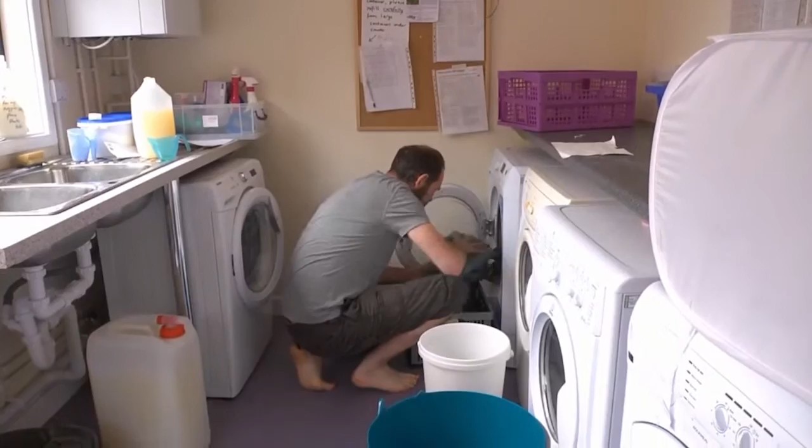We've got a shared laundry, so we don't all need to have a washing machine. We've got a workshop with one set of power tools, so we don't need 20 drills on site. We've got lots of space here, so there are shared community gardens, and a common house, which is a great facility we can use to sit down and have dinner together.

This is the entrance hall, and through here we've got the dining room, with seating for about 30 to 40 people. Three times a week we'll have a meal, which is not compulsory.

A very common feature with co-housing is that all the car parking is right at the periphery of the site, so you haven't got lots of noisy traffic coming through, and it's safer for the kids to play. The kitchen windows all overlook the communal space, so people doing the washing up can see each other through the window. It promotes community, but doesn't enforce it.

It means you get all the benefits of community without some of the downsides. You definitely have a closer relationship with your neighbours than in most other neighbourhoods, because you've got to manage those communal assets. But that's great, because you really build up strong local communities.

Often they're community-led, so in this case we all came together, stumped up the cash, also got a loan, and developed it. So we were the property developer in this case, and we designed it how we wanted it. We've also got an affordability model that makes it more financially accessible for members. There's often an additional ethos behind co-housing, and a lot of them tend to be quite environmentally conscious.

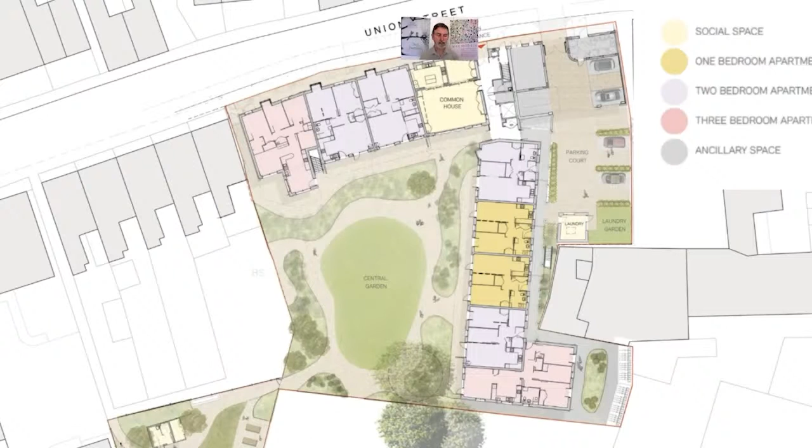In another case, we've got a more rural layout where parking is kept right to the edge of the site. The common house is the first thing you come upon entering the site, and then individual dwellings are ranged around in groups, in this case three groups, around a common area in this lovely extensive landscape.

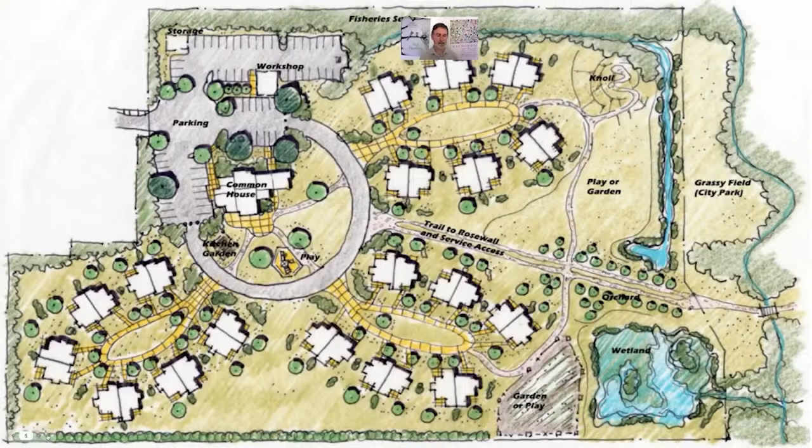In this rural case in Dorset, all the dwellings face onto a horseshoe-shaped common garden. In the case of the Leeds example, a low-impact living, affordable community, the common house is in the middle, ranged around it and around a sustainable urban drainage system pond.

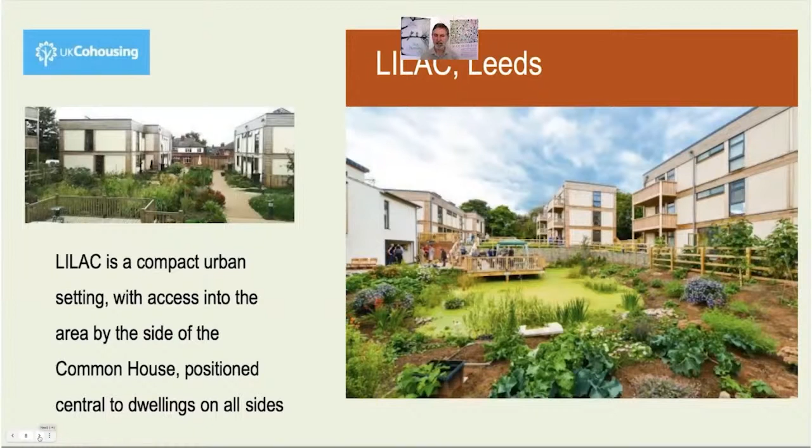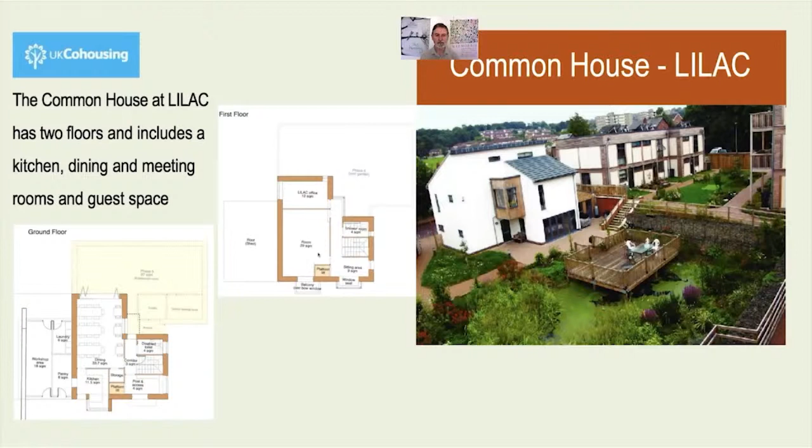A more modest room with kitchen and dining room. There's a laundry to one side, in the case of Lilac, and then a meeting room and so on upstairs, so there are common spaces where people can meet.

In the case of Lancaster co-housing, it's got kitchen, dining and leisure areas, and in some cases guest bedrooms upstairs, so it's not necessary for every dwelling to have an extra bedroom. Now, these are all about people.

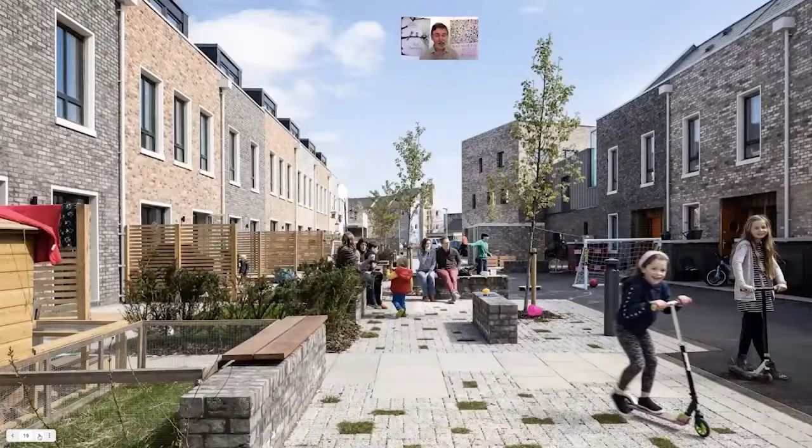Closer to home, this is Marmalade Lane—a home zone, a pedestrian street, in a new set of buildings of 40 dwellings in northwest Cambridge, where developers worked with the council and with Cambridge co-housing to develop new dwellings.

Designing for life is one of the crucial things. I've talked about intergenerational living, but too many of our homes aren't appropriate for us as we get older, and aren't flexible enough to adjust to different family sizes over a lifetime. So this is one of the principles.

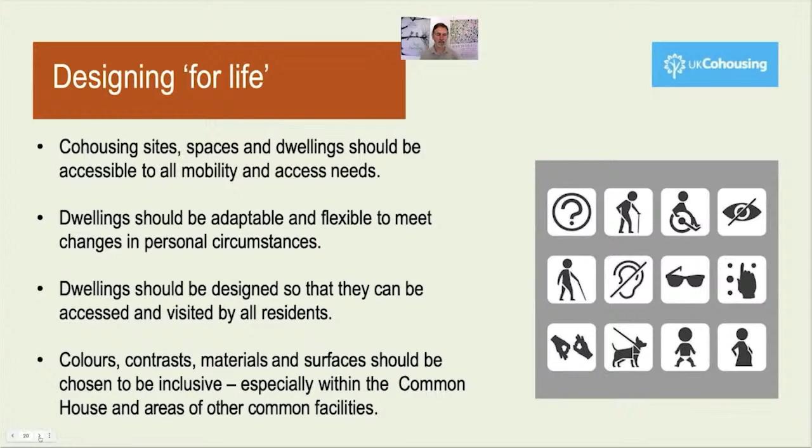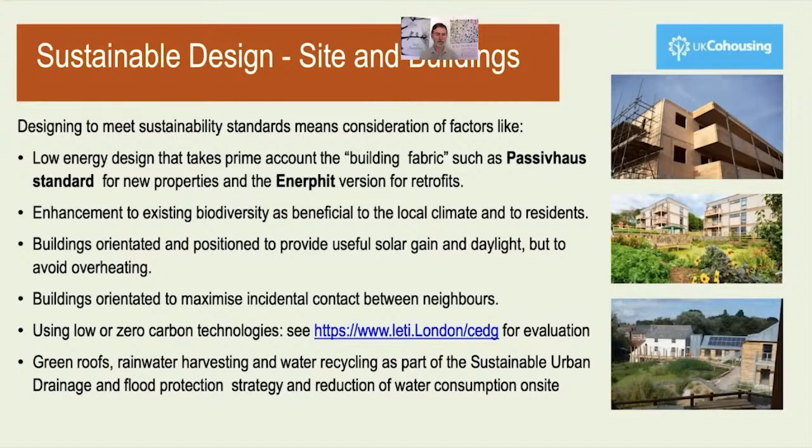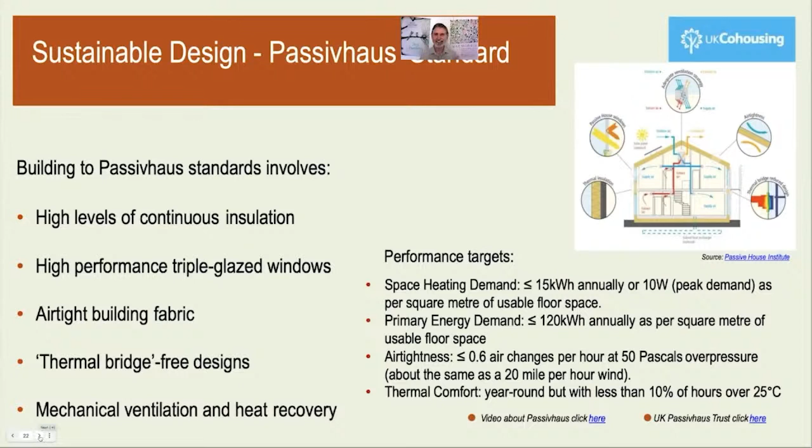Continuous insulation wrapping the building is absolutely crucial to reduce thermal bridges and the risk of dampness and cold bridging. Building tight and ventilating right is a mantra, along with fabric first, that I remember from my architecture school 30, 40 years ago. These are very important principles which still haven't been widely adopted, and we should change that.

Now, I've talked about and introduced the ideas of co-housing. What I want to also talk about now is probably what's not sustainable. What's not sustainable is sprawl.

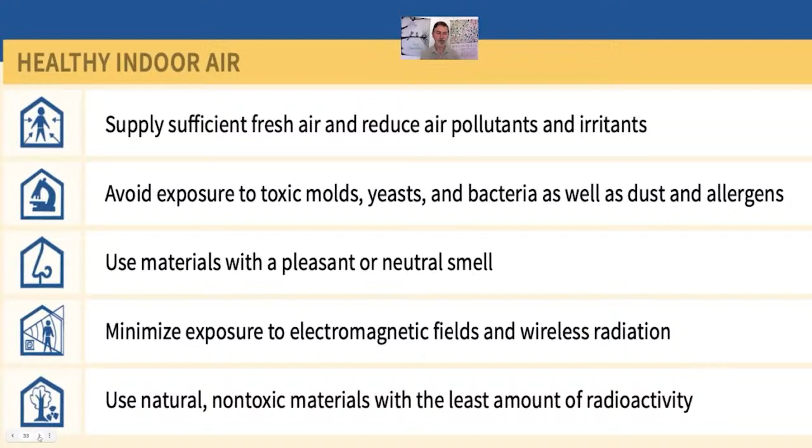But it's essential for us to think about how we can get the balance between efficiency of things and ecological balance. And there are 25 principles that are really, really helpful. I'm sure if you're wanting to follow that up, you'll be able to.

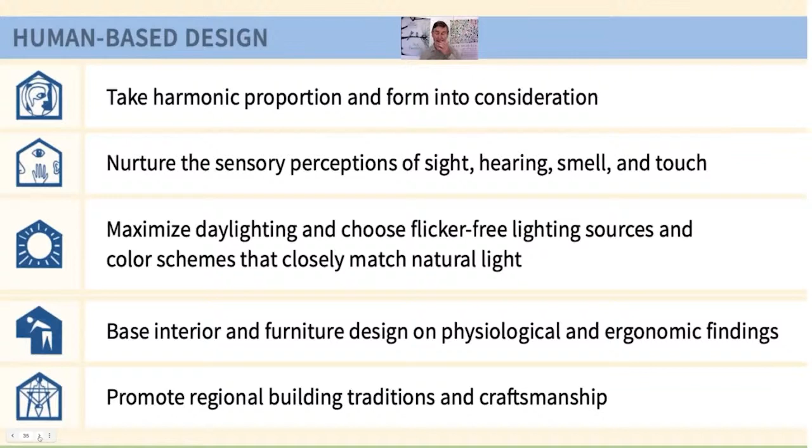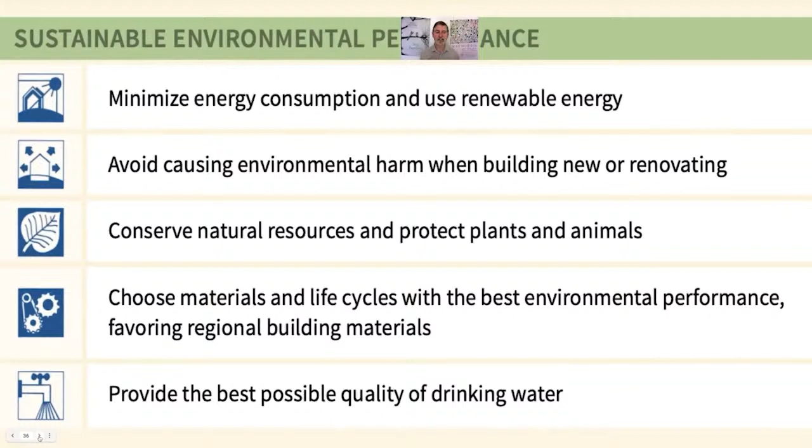Thermal and acoustic comfort, human-based designs, not necessarily working to minimum size of windows to have enough daylight coming in, which can often have a benefit from reducing the need for artificial lighting and so on. Most important, obviously, is energy consumption and using renewable energy. All of these things - there is a social component as well, and this is often forgotten.

So in the same way that we can obsess about carbon, and this net zero stuff is a bit of an obsession with carbon, we need to also acknowledge the nature emergency or the ecological emergency that is happening at the same time around us.

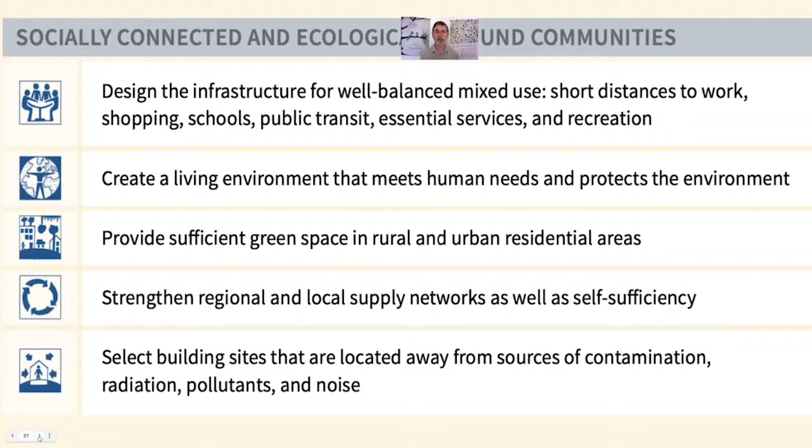Now, there's a recognition of not only the energy and carbon associated with buildings in use, but also the embodied energy. I'm just going to show you a short clip, 2 minutes from the World Green Building Council about embodied energy.

We are in a climate emergency. The IPCC special report warns that all sectors must eliminate their reliance on fossil fuels in order to limit global warming to 1.5 degrees Celsius. The building and construction sector has a vital role to play, as it's responsible for 39% of global carbon emissions.

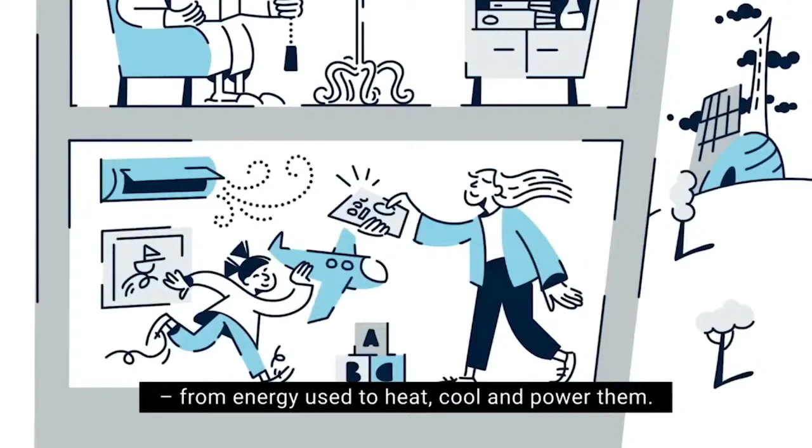The majority of these emissions occur when a building is in operation, from energy used to heat, cool and power them, but a significant amount also comes from embodied carbon: emissions as a result of material manufacturing and construction processes, building maintenance and renovation, and when buildings are demolished.

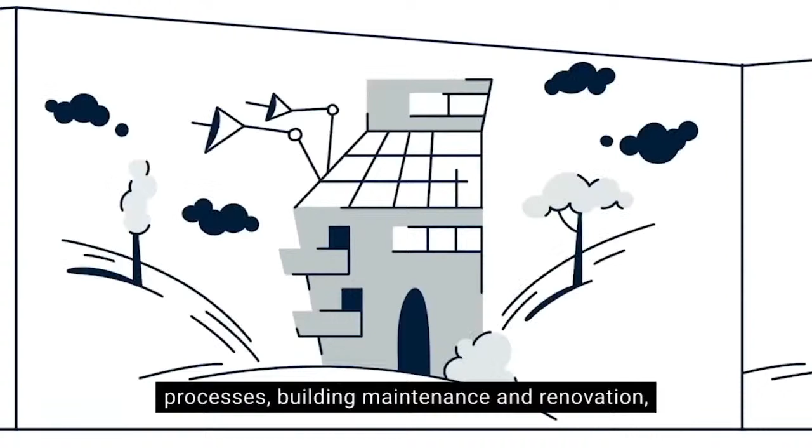In the next 30 years, global building stock is expected to almost double, so we must act now to reduce upfront carbon, the emissions generated before new buildings are used.

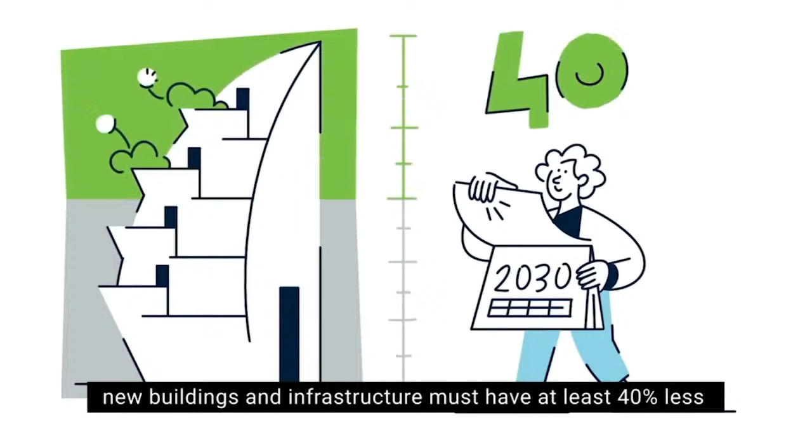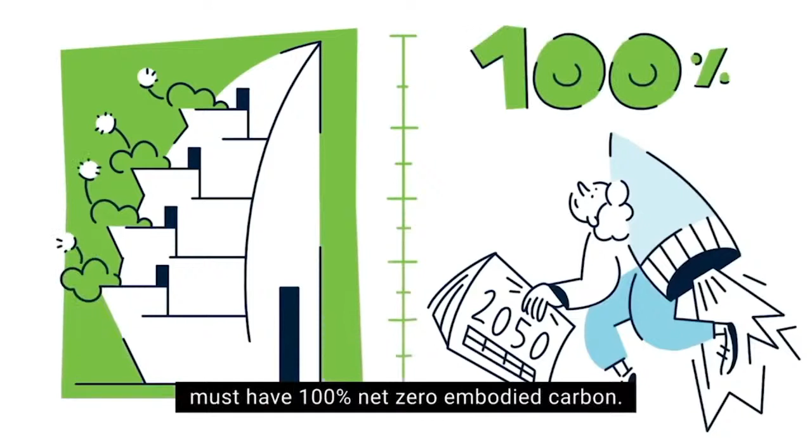Our vision is for all buildings and infrastructure to be net zero emissions across their entire life cycle by 2050. This means that by 2030, along with zero operating emissions, new buildings and infrastructure must have at least 40% less embodied carbon, with significant upfront carbon reduction. By 2050, new buildings and infrastructure must have 100% net zero embodied carbon.

Achieving this vision will require global collaboration across sectors and leadership on the following actions: roadmaps to educate, communicate and innovate towards decarbonisation solutions, ambitious public procurement policies and embodied carbon reduction targets from governments and cities, innovative financial products and services to trigger market demand, clean and lean construction processes, products produced by renewable energy, designers specifying low-carbon products and design solutions, buildings designed to maximise reuse, refurbishment and deconstruction.

The market transformation needed requires a radical change in the way we design, build, operate and deconstruct our buildings to conserve the world's precious resources.

This brings me full circle to a little case study to finish off my presentation. This is about 20 households who came together virtually online this January when we heard that Comiston Farmhouse was again being marketed and put on the market by the City Council.

It's a former children's home in south Edinburgh, in the southern suburbs, on the hill as you go south towards Biggar and Carlisle. It's in the midst of what's now an early sprawl, but still very much within the city boundaries, surrounded by semi-detached houses and bungalows in the neighbourhood.

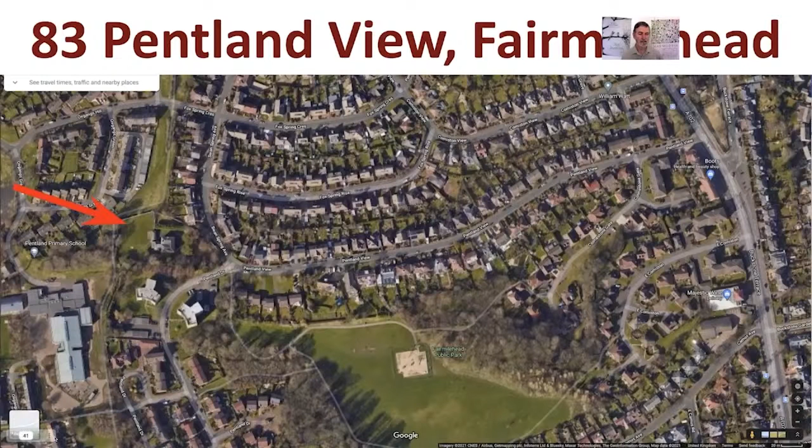We have here an acre of land in a walled garden around the original farmhouse. It used to farm the land on which these houses were built in the 50s and 60s. So it's a well-kent landmark, with cultural heritage and importance.

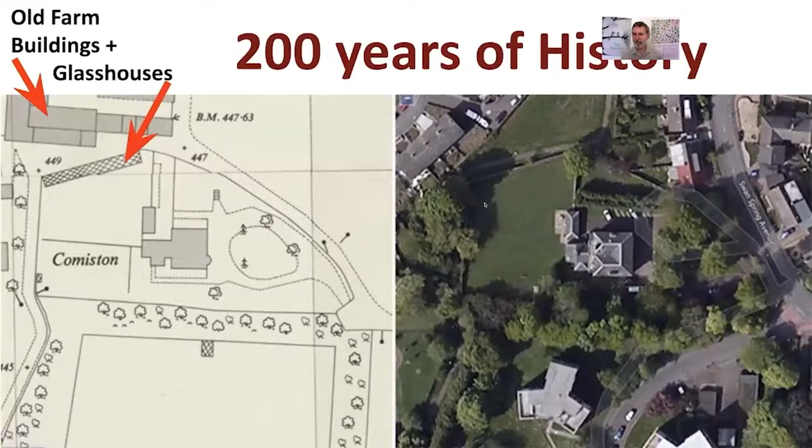Here's the acre of land, the 4-square farmhouse in the middle. Originally this would have been the back garden or the kitchen garden which would have fed the house, and there would have been greenhouses on the north wall there.

It was closed as a children's home in 2015 and put up for sale. The original bidders appointed planned to knock the building down and build 37 high-rise flats, like these ones a bit lower down the hill.

The neighbours went ape, and it was very, very unusual that the planning committee decided to vote against it after this very, very successful campaign to save Comiston Farmhouse.

So we came along after a further upset with the sales, and envisioned how we could convert this farmhouse to a community use and establish an intentional community beside it.

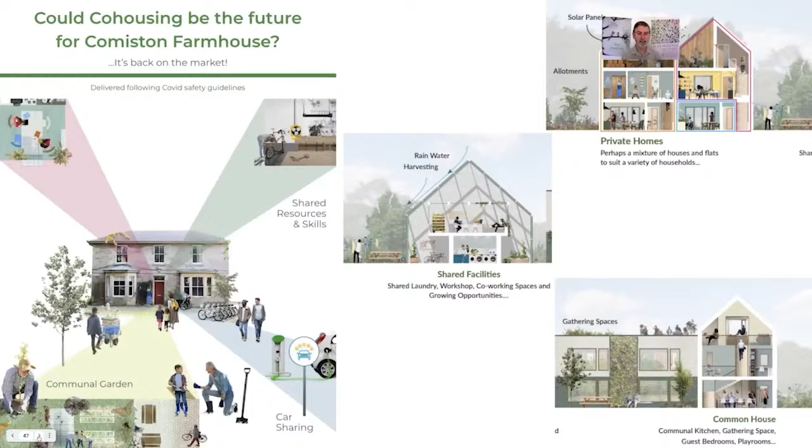We've got these 5 principles co-designed with members of the community, the residents who are going to be living there. Private homes, it's not a commune, as the guy from Lilac said at the very beginning. We would have probably had between 10 and 15 households at Comiston.

The idea of resident control: it's not a developer, it's not McCarthy and Stone, it's not Wimpey deciding what the buildings are going to be like, it's residents themselves. And most importantly, it's part of a diverse, wider community.

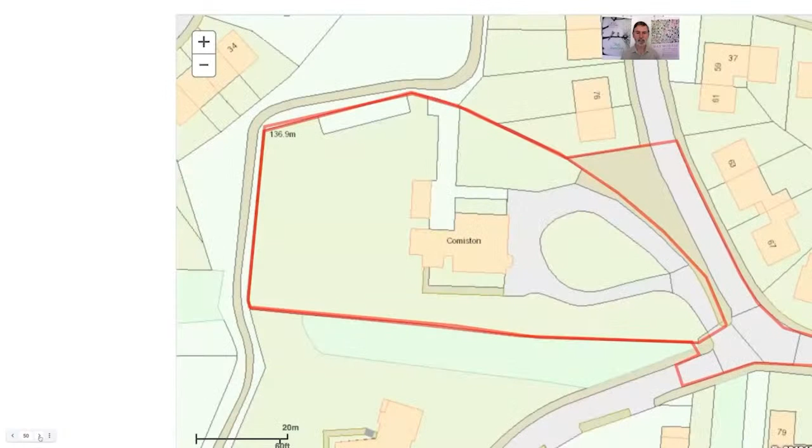So here's the site, and we originally envisaged just a terrace of narrow frontage homes on the back green. But then we found there was a culvert, a stream in a pipe running about 4 meters underneath the back garden, and it would have cost an awful lot to divert it round. I think this was one of the upsets from a previous developer.

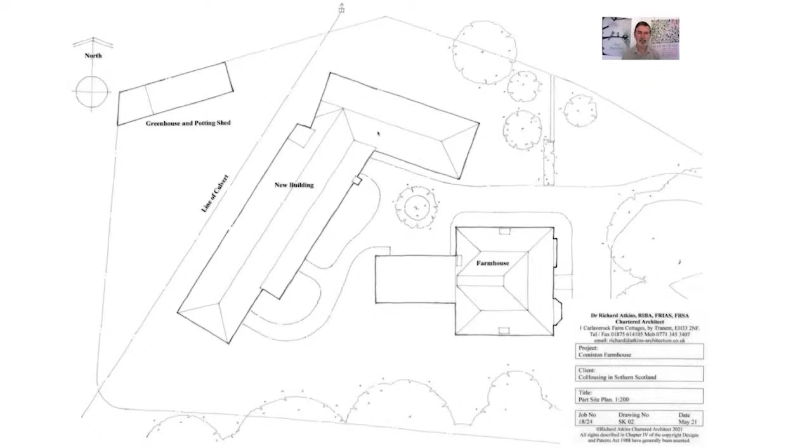So our architect designed it working with what we had: a simple terrace of 2 terraces of houses.

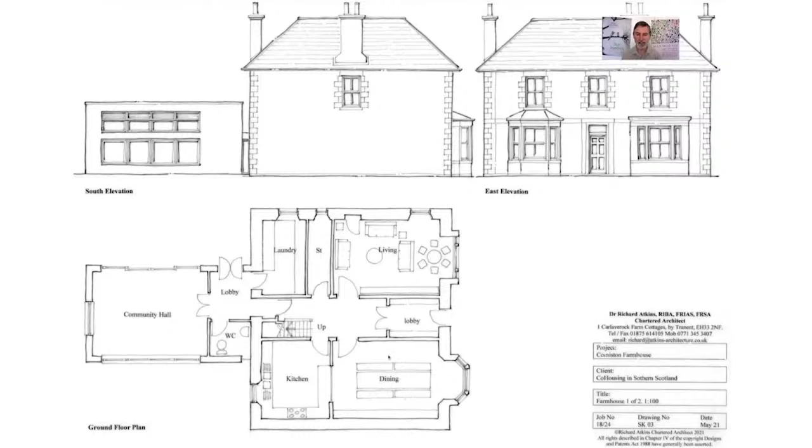Here's the existing, quite generous sized farmhouse. The big reception rooms would be used as dining rooms and could be cleared and used as a film space - you could watch films there or have a ceilidh - and a living space. Then upstairs, a couple of flats either side of the main corridor, and the L-shape of the terrace of the new build at the back, very well insulated.

And this is what I'm now going to touch on: what should we build it of? Nearly everybody, even though they were lay people, were really excited about the idea of exploring seriously the concept of cross-laminated timber or mass timber. The reason is practical - it's a very quick way of off-site construction, but also it can sequester carbon in its construction, which we just heard about from the Green Building Council.

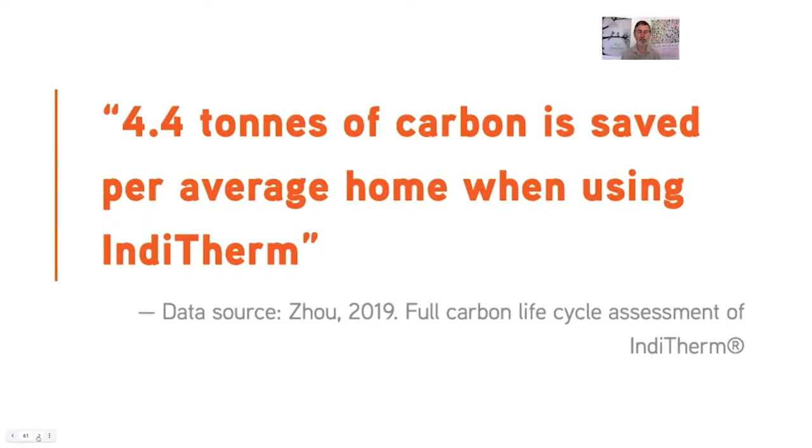Looking at the insulation, we've been exploring an innovative Scottish initiative, IndiNature, based at the Edinburgh Climate Change Institute, where they've developed a new concept of growing hemp, about 6 foot high, a plant that grows seasonally with lots of fibrous material which can be made into benign batts and boards. The growing absorbs carbon dioxide, and independent researchers have estimated between 4 and 5 tons of carbon is saved per average home. So this is good for nature, good for people - the people is the important thing.

And so I'm going to end off with some nice comments from the largest co-housing community now being constructed in Dorset, on the south coast of England.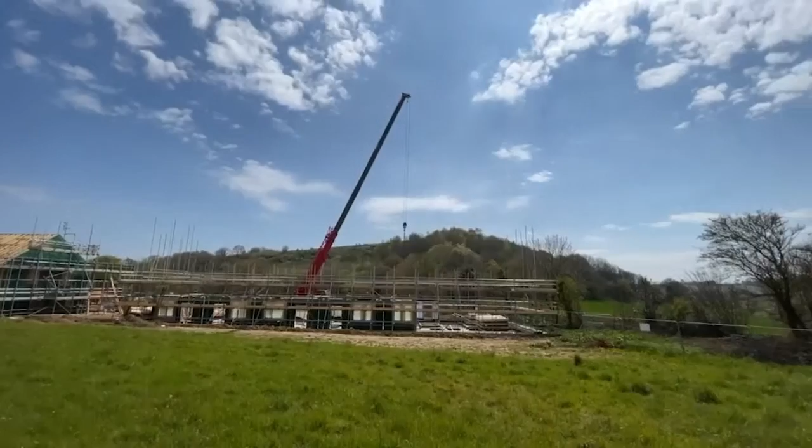Co-housing is sharing, friends, being more environmentally aware, community - hooray! Connecting, caring, growing together, reassuring in a complex world. Co-housing for us means security, living with neighbours who we know will look out for each other. My daughter and other people's children can grow up with lots of other adults looking out for them. It gives us a chance to possibly own our own house. I am looking forward to not having to worry about my landlord serving me notice every 8 weeks - it will be such a relief to have a house we can actually afford to live in. Having a modern, eco-friendly home, it will be possible to share things such as transport and food growing. We can have smaller houses because we've got big shared facilities - open fields, guest rooms, and a common house. We need somewhere to eat, I need somewhere to run and be myself, I hope we can do camping in the field. It gets harder and harder to prepare and enjoy good food just for myself - the common house will give me a place to cook and share food with friends and neighbours, all ages, all backgrounds. This common house is absolutely core to what our co-housing project is about - it's the heart of the community.

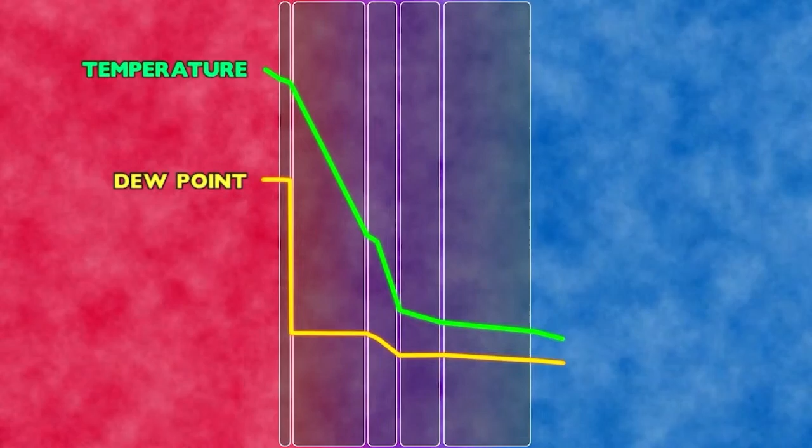So let's quickly recap on how condensation problems originate in the building fabric. As we move outwards through the building envelope, the temperature will drop according to the thermal properties of the various layers within the building fabric. Alongside this temperature gradient, we can also calculate the dew point at any given position - this is the temperature at which air becomes saturated and loses its ability to transport moisture vapour. Once this dew point temperature is reached, the airborne moisture vapour turns into liquid water and can lead to interstitial condensation if not carefully managed.

Understanding how these two temperature gradient lines are influenced by the properties and positions of the materials used is key to a robust and healthy building envelope.

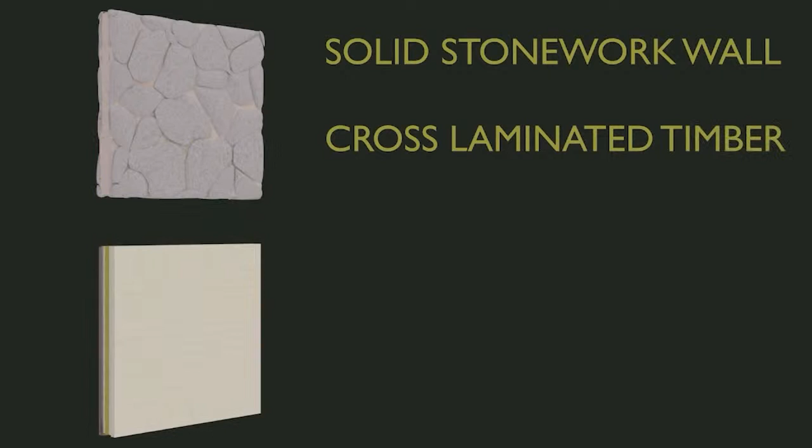To illustrate this, we'll consider two basic wall constructions: an existing solid stone wall commonly found in refurbishment projects, and a more modern cross-laminated timber panel wall. CLT panels are finding increasing use in passive and low-energy new builds, where the combination of sustainable low-wastage off-site manufacture and flexible design options are particularly useful.

In each case, we'll look at how the hygrothermal situation varies, whether insulation is placed internally or externally, and how the thermal and vapour transfer properties affect the relative positions of the temperature and dew point graphs within the wall. In a cross-laminated timber panel, the most common configuration is to place the insulation and any associated construction membrane on the outside of the timber structural panels.

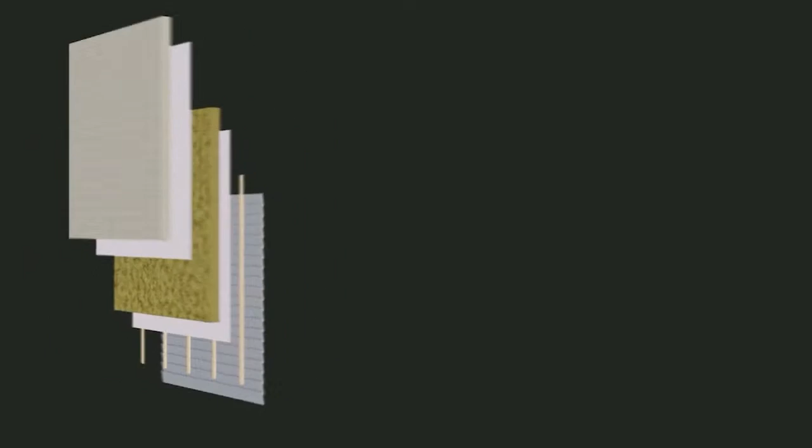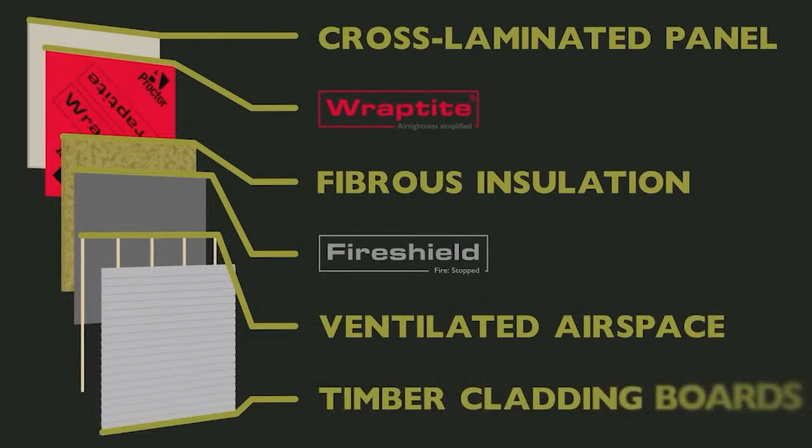Shown here is a typical build-up using our Wraptite air barrier, adhered to the CLT to provide the airtight line, a fibrous type insulation, our Fireshield vapour permeable membrane, and finally a timber cladding system with a fully ventilated void behind. In this construction, the vapour resistance decreases fairly consistently as we move outwards.

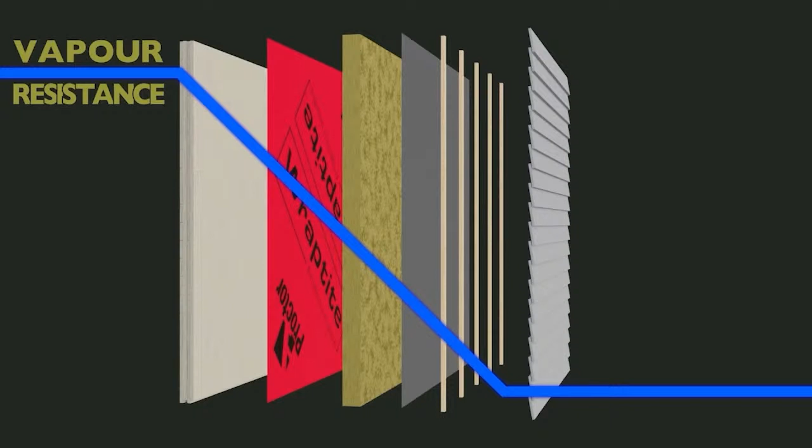So the dew point and temperature gradients remain well separated, meaning there is little or no risk of condensation occurring under normal circumstances. In fact, because the vapour resistance on the warm side is sufficiently high relative to that on the cold side, the specification of the insulation can be varied with little chance of introducing a condensation risk. This is because the moisture vapour can escape the element before it cools enough that it condenses.

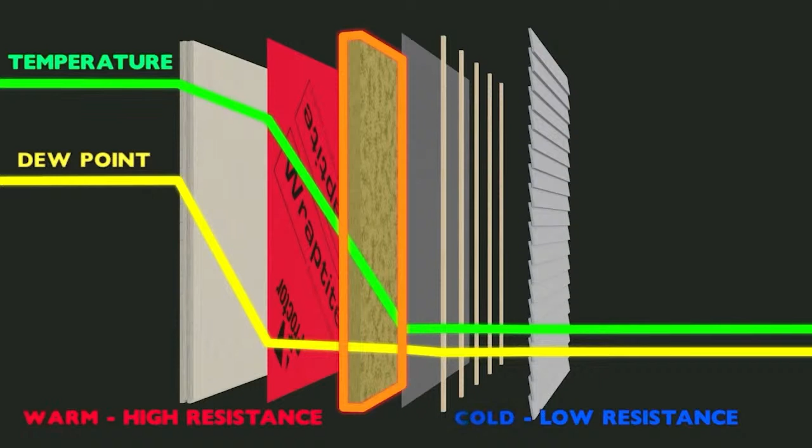If we vary the thermal and vapour resistance characteristics of the insulation, it will affect the relative positions of the temperature and dew point lines, but the temperature will not reach the dew point. This makes externally insulated CLT a very robust construction method from a hygrothermal standpoint.

On the other hand, if we flip the construction around so our insulation is internal to the CLT panel, the situation is a little different. Now there is more vapour resistance on the cold side, so the temperature in the construction drops down too quickly relative to the rate of moisture vapour escape.

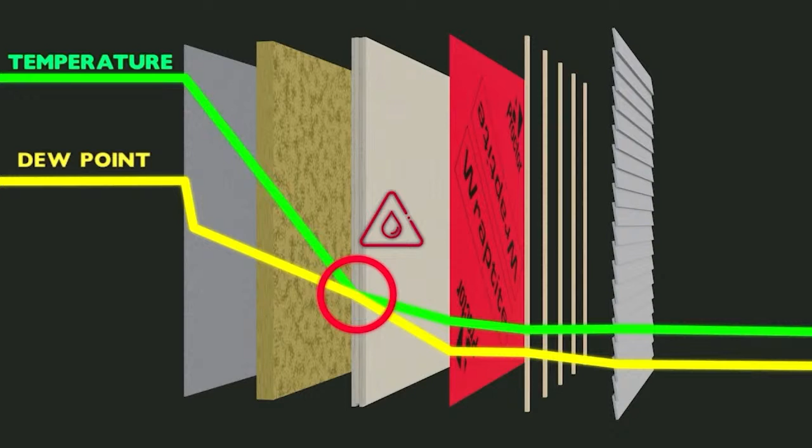The moisture passing through the insulation is hitting the relatively cold inner surface of the CLT panel where it can condense. The more insulation we add, the colder that surface will become, as less heat from the internal environment will reach it. This reduced temperature will in turn make the condensation risk at this interface worse.

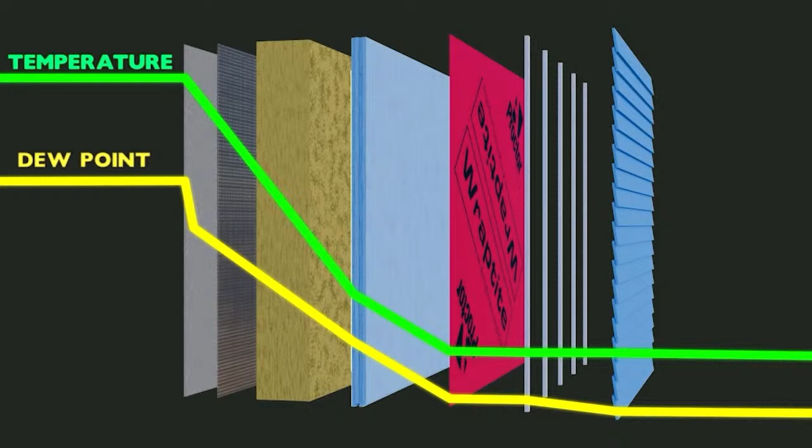In order to remedy this, we need to limit the quantity of vapour entering the construction, which on paper can be achieved by adding a vapour control membrane internally. This boosts the level of vapour resistance on the internal side, increasing the gap between the dew point and temperature, and reducing the condensation risk.

There is a complication with this approach, however. While a vapour control layer or a foil-faced insulation board with a similarly high vapour resistance will reduce the dew point, its as-built performance may not match its performance on paper. If the membrane is not sealed properly at laps and junctions, or is damaged either during installation or by following trades, it may allow more vapour through than it should, reintroducing the risk of condensation occurring.

Increasing the vapour resistance like this also requires careful consideration of indoor air quality and the provision of fresh air to the living spaces. Too much vapour resistance can make internal spaces unpleasantly humid, and in extreme cases even unhealthy. So while in other types of construction, such as timber frame wall panels, there may be other advantages that mitigate this problem, in a CLT construction it's far easier to place all the thermal resistance externally and keep this vapour resistance as low as possible throughout.

This breathing wall type of construction helps ensure very highly insulated building envelopes can both limit the extent to which powered ventilation is necessary and have flexibility in the specification of insulation materials. This is important in more ecologically focused design, where materials such as hemp batts or recycled fibre products typically have very high levels of vapour permeability and may require a lot of depth to meet U-value requirements.

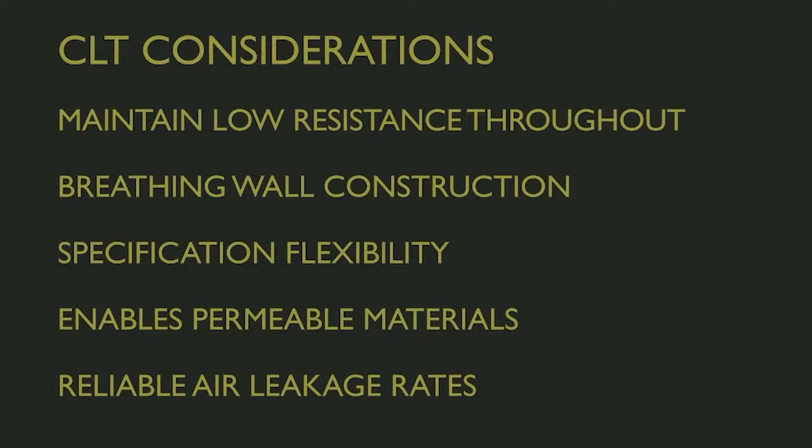An advantage of this approach is that air barriers such as our Wraptite can be used externally on the CLT panel, with all service runs positioned internally. This provides a very robust airtight layer with minimal penetrations, ensuring the low air leakage rates required by passive or near passive standard buildings can be reliably met.

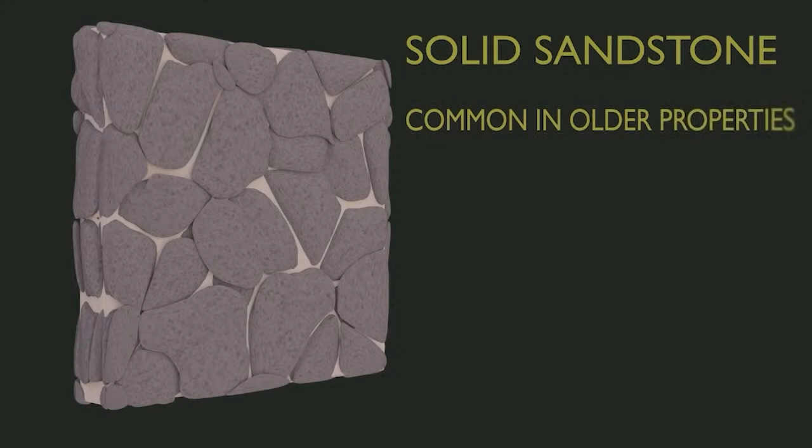In this case, we'll consider a solid sandstone wall, common to many older properties. Sandstone is a relatively soft sedimentary rock, which means walls built of sandstone can be particularly sensitive to hygrothermal effects such as moisture absorption and freeze-thaw cycling. This means that in addition to considering the flow of moisture through the construction and any condensation risks, we must

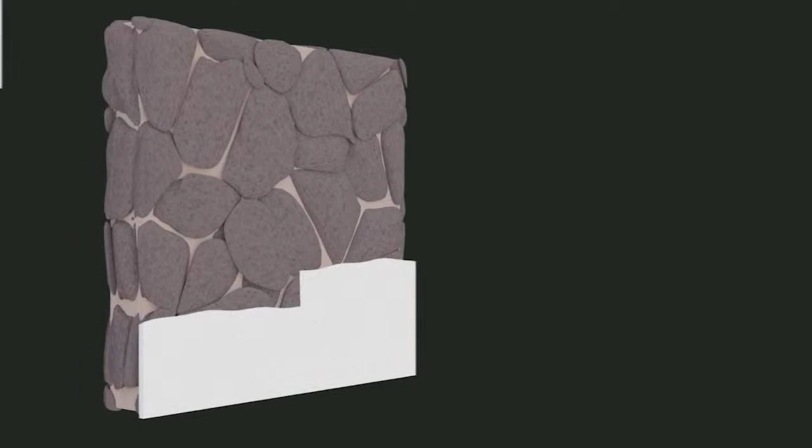also consider the capacity of the stonework to retain and store moisture. In this case, we can use the same analysis tool that we use for the CLT panel, a method defined in BS EN ISO 13788 and known as the Glaser method, to obtain a basic view of the condensation risks at the interfaces. Once again, this will show us that a higher vapour resistance on the cold side will lead to an increased risk of condensation, and higher levels of insulation internally can exaggerate this effect.

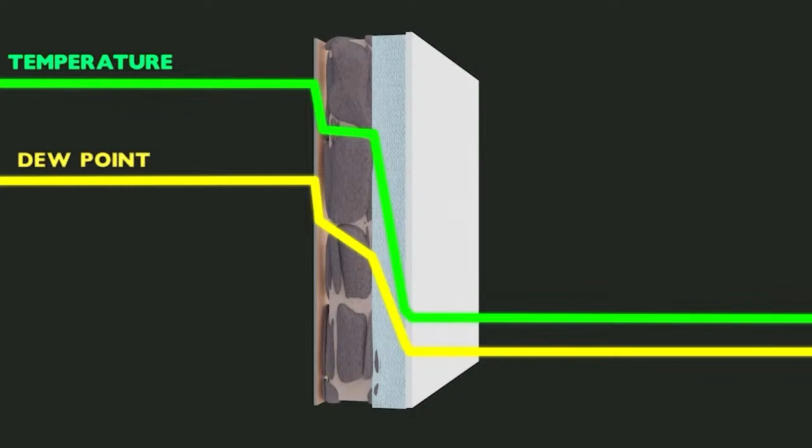As before, we can reduce the risk of condensation by placing the insulation externally and keeping the stonework warm. But in historic properties, this approach may not always be possible or practical due to conservation considerations or external features like gutters, downpipes and overhangs.

There is, however, an important limitation to the Glaser assessment that we should consider, particularly if dealing with sensitive historic materials such as lime-based plasters and renders. The Glaser method considers the moisture flow only under steady-state conditions and does not account for the capacity of material to retain moisture in liquid form. This means that any wetting-drying effects to both the indoor and outdoor environments are ignored. The effects of weather such as driving rain being absorbed are also not taken into account.

Fortunately, however, there is another calculation method we can use that will account for these effects, and this is outlined in EN 15026, Hygrothermal Performance of Building Components and Building Elements, Assessment of Moisture Transfer by Numerical Simulation. This standard, which allows for the dynamic assessment of moisture movement, including weather and moisture accumulation effects, is specified in the BS 5250 Code of Practice for assessing the hygrothermal performance of solid walls.

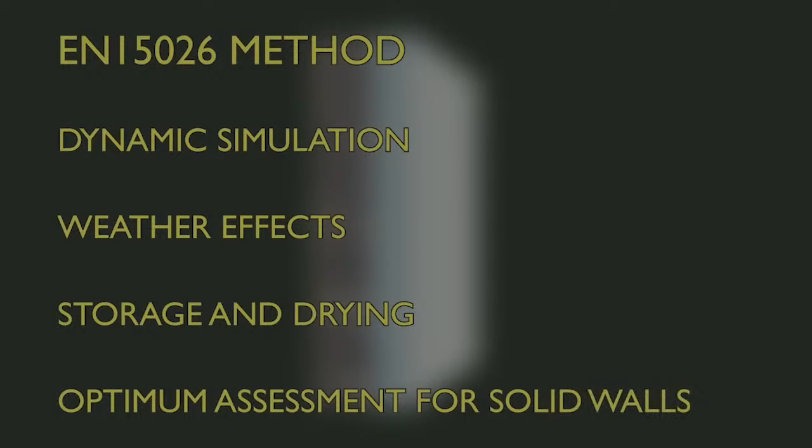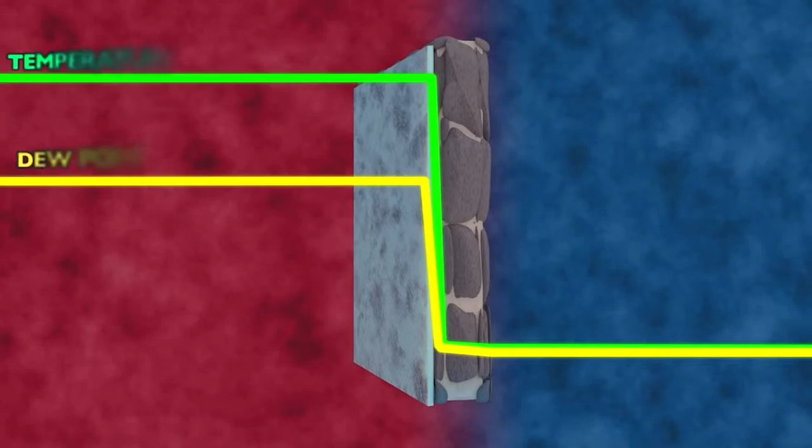So if we now take another look at our solid wall using this method, the results become a little more nuanced. The internal insulation case, where a permeable insulation like our Spacetherm aerogel is used, can show a higher degree of condensation risk under the Glaser method.

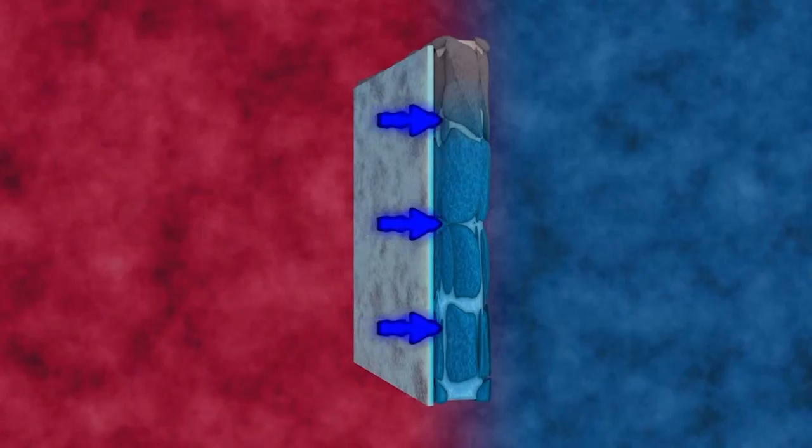But if we include moisture storage and inward drying in our assessment, this moisture accumulation can be accommodated in the fabric until conditions are more conducive to drying. This effect also means that the overall moisture risk can, counterintuitively, be at its lowest when vapour control layers are

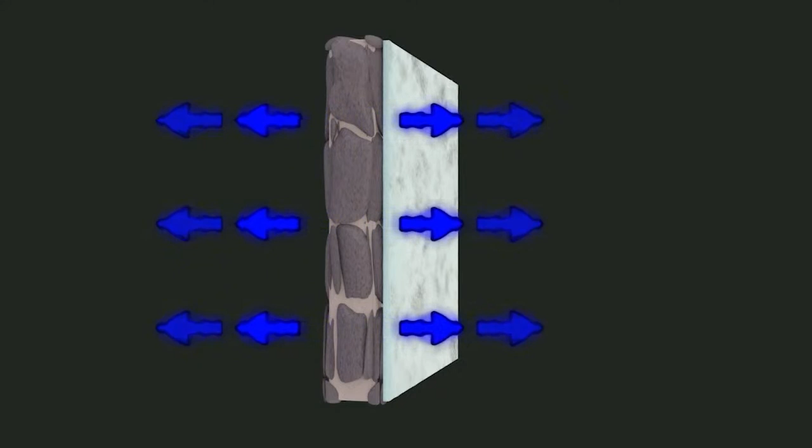omitted. If we flip the insulation around to the outside again, while this still poses a lower overall condensation risk, we still have to ensure the stone of the wall can dry out effectively and that the passage of moisture vapour is not disrupted. Many older properties are finely balanced systems, where the balance of heat and moisture transfer has

remained more or less for many years. Adding modern materials and applying modern performance standards can therefore disrupt this balance and can cause damage to the existing fabric. Lime-based plasters and renders are particularly prone to this type of problem, as lime is significantly more permeable than

most modern mortars. If the retrofit work is not well considered and the moisture content in the stonework changes dramatically, it can cause a variety of problems. If the moisture content goes too high, this can result in damp problems arising internally, or the expansion caused by freeze-thaw cycles can cause cracking and spalling externally.

Conversely, if the structure dries out too much relative to its historical baseline, materials can shrink or become too brittle, again leading to cracking and deterioration of the building fabric over the long term.

The 15026 assessment not only allows the full range of performance characteristics and environmental effects to be incorporated into the model, but it also allows this to be run for extended time periods. This allows the identification of small problems that may increase year on year to grow into larger ones over many years. This detailed knowledge allows designers to ensure retrofit work is sympathetic not only to the aesthetics, but also the hygrothermal characteristics.

Therefore, we can ensure upgrade work is sustainable not only in terms of environmental impact, but also in terms of long-term robustness and durability. It allows energy performance improvements to be maximised, whilst limiting the scope for long-term problems to arise with either the building fabric or the health of the occupants.